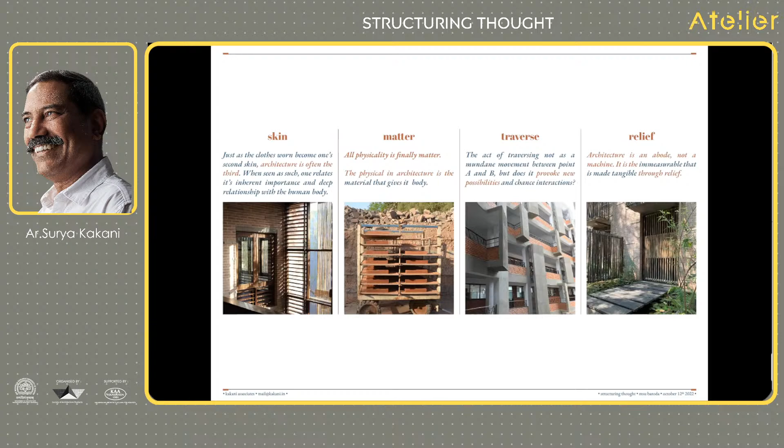Next. So if I was to explain skin to you here, this is a project, the corporate headquarters of a company that exports bed linen to Scandinavia. This is in Vatva, in the industrial estate. This is a blown up ISO. I'll just quickly read this: we had done a double wall kind of system where the idea was to reduce air conditioning loads. So the main building is clad within a singular extra wall on the outer facade.

The skin is that which mediates between the real outside and provides an immeasurable experience of the everyday. We are in it all the time. It is that space within which we are private and social simultaneously. It is thus required to address far more complex realities. It is also through the perception of that skin that the body is experienced. And when I say skin in this context, you understand what I'm saying—it's that skin there.

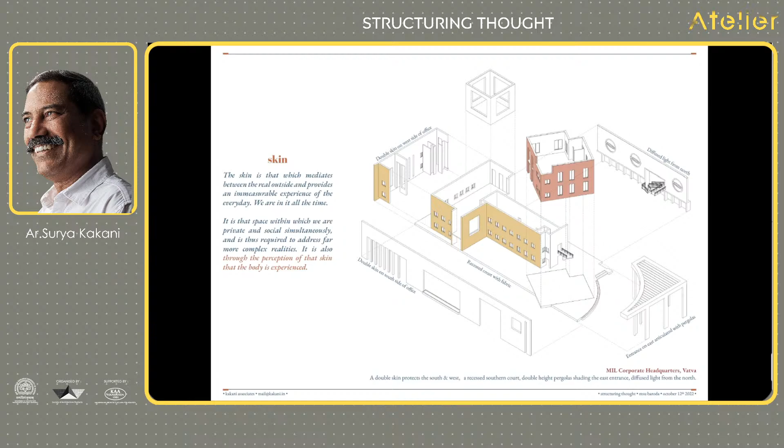Next. In our geographies, how we mold, create, invent the skin is dependent on or arises out of our concerns of resources, material realities, climate appropriateness, technology, energy consumption, aspirations. So do we see the skin as just an object that is just the cover? Or can it have all these things we just talked about?

This is a factory, the same corporate office that you saw. This is the factory behind, where you can see its deep-set windows. So the skin is made out of load-bearing walls with red and fly ash bricks interspersed. This is the corporate office, where the courtyard on the south side is covered by a fabric structure, which is what you call the green net—you get a gray net, it's actually that gray net. It shades the court and allows diffused light, and yet you get a court.

This is a campus of a kindergarten where the large louvers are two-floored louvers, which open and close depending on the condition outside. If it's pleasant outside, it's a large space on both sides, like this kind of space which has got louvers on both sides. So if the weather is beautiful, the skin opens up, and that's what that's about.

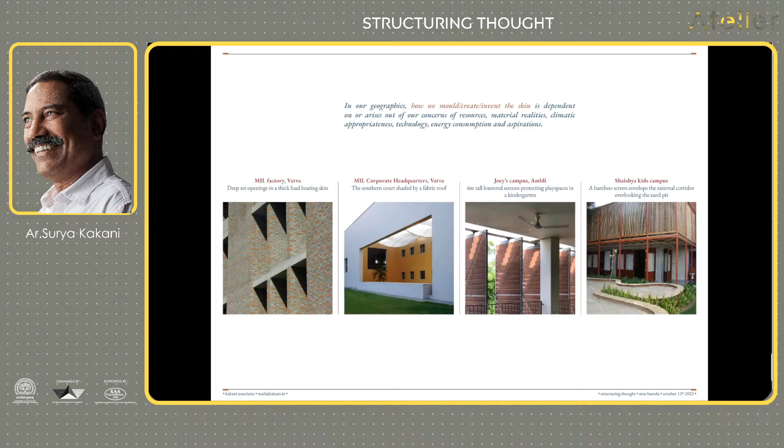The skin mediates between the inside and outside, and its resolution marks this relationship. The act of its being is realized in the way the skin modulates, addressing myriad realities that are expressed through the articulation of its apertures.

You understand what apertures are now? All our windows are apertures. The windows are the aperture of our walls, which is the skin. In this case...

This skin has been—this is the factory, where this is a double wall. The wall is load bearing, but it's been turned around in a way that it becomes a shaft. So the air moves in the shaft and is released at different levels and then exhausted out from the center. So the skin becomes a breathing skin, which actually gets fresh air from outside into the factory and deep inside.

This is a large span, about 50 meters by 70 meters, with load bearing outside. So the outside skin is thick, it is solid, you can't see out except through these deep windows, which you saw in the earlier shot. And the breeze is taken in through these shafts. So this is how the skin has been modulated.

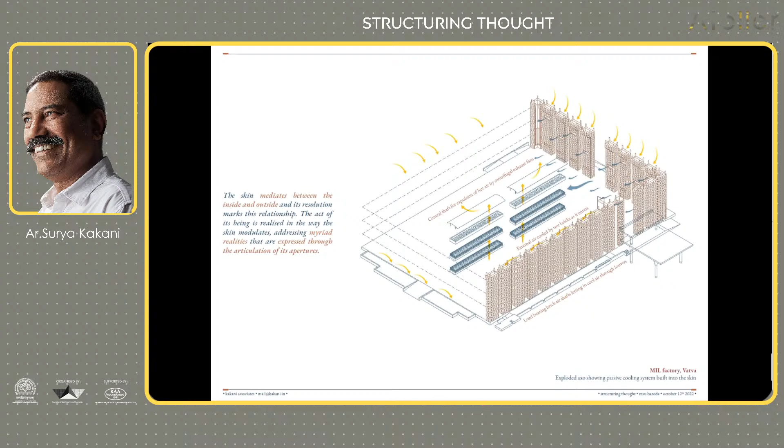That's a detail of that. It's better explained here. You can see the thick wall, the breeze comes in through here and moves into the space and moves out from the center. This is what you see on the outside.

The walls, and this is the basic structure. This is a three-floor load bearing structure.

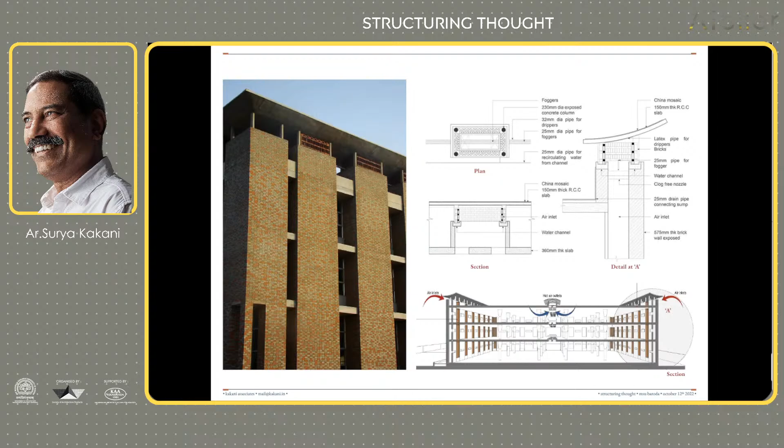These are just samples that we did. We wanted a passive cooling system that Dr. Chamanlal Gupta was helping us with. So these were various experiments. That's a close colleague, Raj, an engineer who we've been working with together for now 15 years plus. So basically we did various experiments about which is the best way to allow the breeze to pass through these kind of surfaces so it cools down and then goes into the surface.

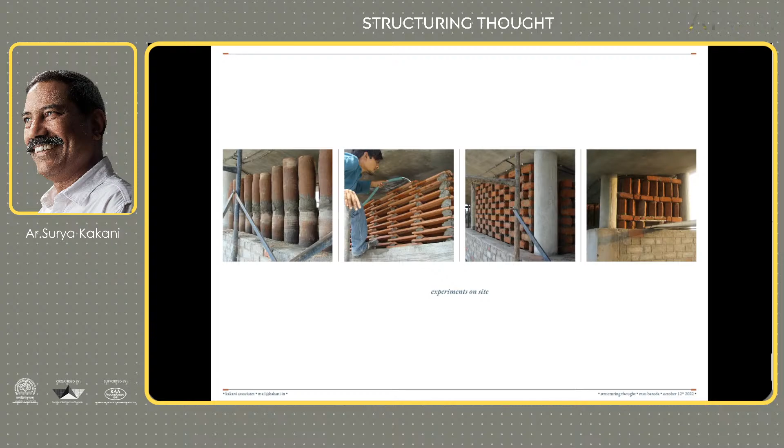So we did these cylinders of clay, like matka, but then we had problems of fungus on the outside. We realized maintaining would be a problem. We looked at Mangalore tiles, we looked at brick in different layouts. Finally, we went for brick in this pattern.

So that was about skin. Now matter. How does one design something conceived with a material consciousness that nurtures the building through its life and enriches the same? The practice has been dabbling with this through the lenses of embodied energy, social equity, resources, maintenance, and building life.

I don't know how many of you—by now I think this generation is supposed to understand embodied energy. You must check out what it means, because your next 40, 50 years is going to be all about these areas that you're going to have to work on. So embodied energy is an extremely important concept.

Keep that in mind. Social equity—social equity basically is how much money do you spread out. There is an X amount of money that you're spending on building a building. Out of that proportion, how much of the building amount goes to skilled labor, artisans, craftsmen, or even labor, or a major amount goes to an industrial system?

So if you use certain kinds of technologies, you'll probably be paying an industry, a corporate. But if you use certain skills that exist amongst us, load bearing, simple load bearing skills, which give you a lot of other advantages—I'm just using one example because that's the one we've taken, but there are so many other skills available in our system where you're able to create a huge amount of employment, and along with that create a certain quality of experience when you're actually working through the making of this building.

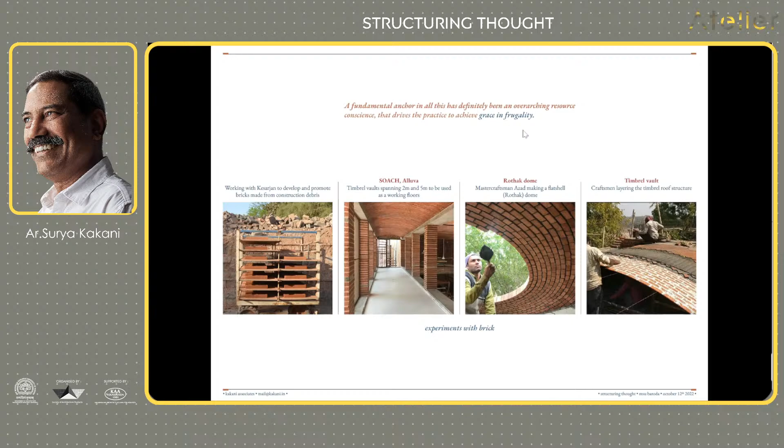Continuing with the idea of material, basically matter, collaboration with craftsmen, engineers, contractors, and other agencies have provided insights that allow us to refine the building product, and make this a joyous process. The interactions constantly push us to re-examine construction practices and available skills, allowing us to add value to an otherwise rote process. You know, you can simply draw a building and give it to an agency, and the agency will take it forward and build.

There's enough expertise now on ground. Everybody knows how to build walls, everybody knows how to put columns and beams and slabs, so your job can actually be finished in your little studio. But it's up to you to decide whether you want to let somebody else enjoy it, or you want to partake in the joy of the process coming up. So how do you investigate? How do you become part of that? And I think that's the other thing.

When you investigate and begin to think about these concerns, you will start thinking about various ways in which material can be harnessed to your advantage. So in this case, in the MIL factory, that large span factory I was talking about earlier, it's a large span, about 10 meter spans, columns. You can see in the last slide.

There was a lot of concrete that would have been used, and I don't know if some of you may have done your structural engineering class - most of us must have slept - but for those of you who may remember, you actually don't need concrete through and through. There are parts where concrete is not needed. It's in tension, you don't need it. So you can actually remove concrete in those spaces. That's what is technically called a filler slab. So check out filler slabs, where you can actually save on concrete quite a big time.

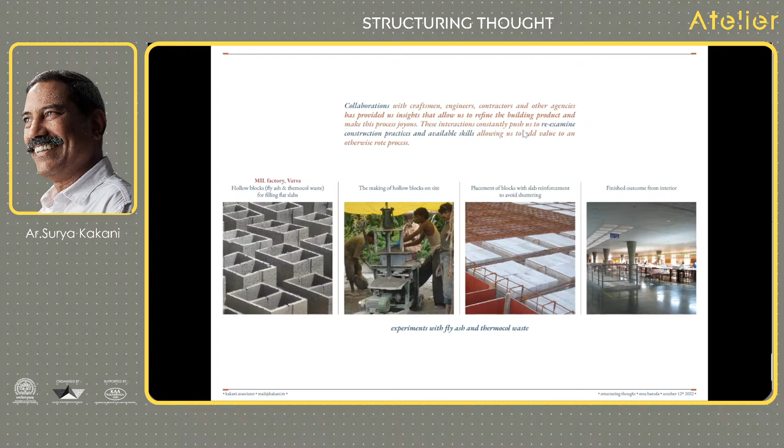So this is what you see, this is what you get as the final product, bottom of this slab. And so much concrete is saved. Next.

Again, understanding construction practices, production practices, and resource constraints pushes us to innovate and inform the making. So it's like this in our own studio, where we've actually used a lot of bamboo as jalis, as doors, as boundaries between spaces. Similarly, the same material we've used on top of the shuttering as a texture giver. So these carpenters are working for us here, and you can't see it very well in this slide, but when you remove the shuttering, you get a fine grain bamboo texture on

the roof. Similarly, the jali: when all the creepers are grown up on these jalis, it becomes a beautiful space from inside. You get the fragrance into the room. So it's the same material used in different ways. Just an example of that.

Next. So I'll explain these jack arches a little in detail, because one of the things I realized is that when we started to do a jack arch, this was one of the first times we'd done one. We'd done those other things five or six years before, but we've started really looking at alternatives in roofing only in the last seven or eight years, because for some reason information wasn't really available. Structural engineers are not really used to this now. B, it's not that somebody's done it before you here in these parts.

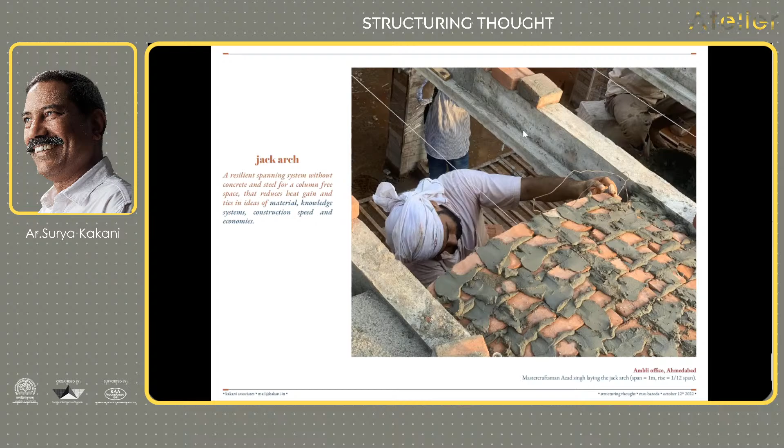So these are basically horizontal beams on which... I'll go next, please. I'll explain this as it goes. You can actually see this. This is the first layer. The first brick is put in like this. The arch is marked, and then the brick is put, and then the next bricks, and then the corners are filled in. So the first arch is stabilized, and then you continue building the arches.

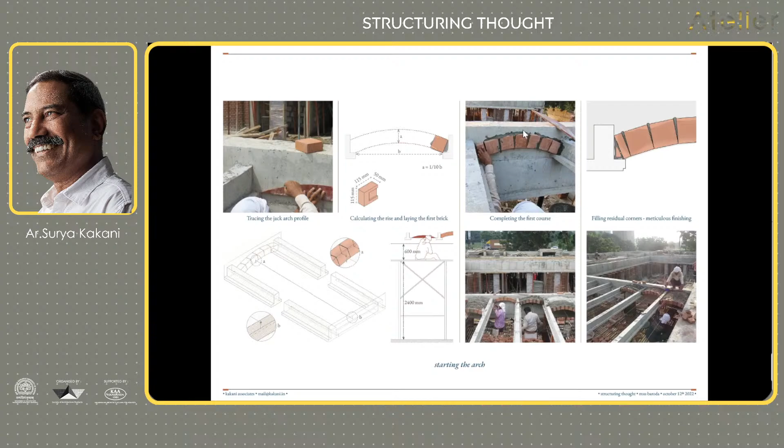So you can make that arch up to maybe a meter or so, and then the person goes to the next one, builds the next one, builds the next one. So a couple of masons are continuously busy. And in less time than it takes to build a normal slab, one can actually do this whole thing. But fundamentally, the largest advantage we've found is it gives you a thick slab.

By now, we all know that it's not the south or the west that's the real culprit. The real culprit is our roof, because the roof is sitting in direct radiation. It's like how your head gets heated up in the sun. It's the same thing with buildings. The roof is the biggest culprit through which induction of heat happens into your walls and buildings. So if you are able to save your roof from heating up, or at least reduce the thermal gain somehow, this would have a major impact.

And so systems like these, other than skill and obviously quality of space, are also helping you increase your thermal lag, reducing thermal gain. So these are just slides which are showing those spaces.

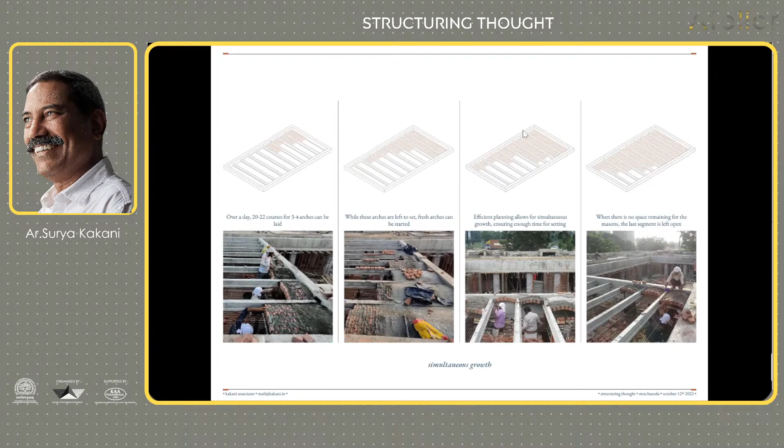I'll go on that side. Is it easier?

Yeah, much better. So what happens is, if you look, the fellow is actually here, but when he reaches towards the end, obviously he can't be sitting. So in the last one meter, we put up a small system like this, with pieces of shuttering in the form of an arch, and the last pieces are put up from the top like this. And so this whole thing is actually built on site, and this is the kind of space that you get. This is just a blow-up of a drawing.

So we do all these detailed drawings with the idea of how many bricks and what kind of courses, because this is what you're going to see exposed. Can you go to the next, please?

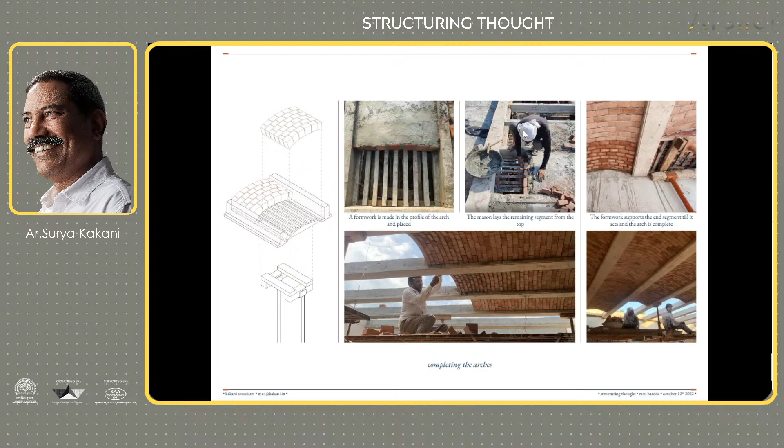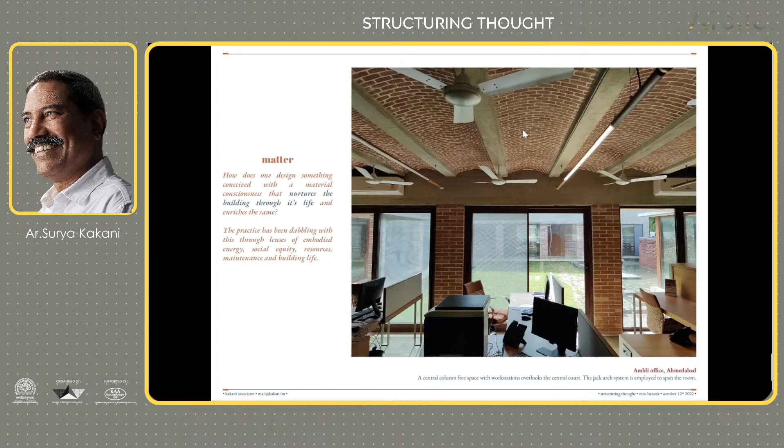Okay, maybe we'll get that slide somewhere else. Oh, the first slide of this, I don't know how many of you remember, was actually of this building when we started with material. Further, further. Yeah. So this is that space. Just to what you were seeing in construction, it was this space. Can you go now to? So the

Third, the last, is basically the third part, is about traverse. It's very simple. Architecture is static, but the user isn't. Right? One experiences architecture through traversing space. It is this traverse that creates joy, allows for the social, that connects the various experiences encapsulated in the building. So how you move through the building or to the building or around it is as important as the others that we've been talking about.

So this is a project we won in a competition about 12 years ago. HMR, Hyderabad Metro Rail, was passing through a very dense urban neighborhood, like the old city area, where you had a lot of vendors on the sides. And all those vendors and small shops had to be reorganized because they were refusing to move. And so they wanted to rehouse them, and they gave a site for a competition, and they said that we have to rehouse the space.

So what we did was, obviously, this is a street where, what are these vendors selling? They're selling things from 5 rupees to 50 rupees to 100 rupees, things like belts, kerchiefs, pins, all kinds of everyday things. Which means people are continuously moving through the bazaar, and on the spur of the moment you realize, oh, I need to buy some handkerchiefs, or you need a belt, or some pins. It's pedestrians walking through a bazaar, picking up things and then moving into their residential zones. Now that was very important to understand. It is not like your regular shopping.

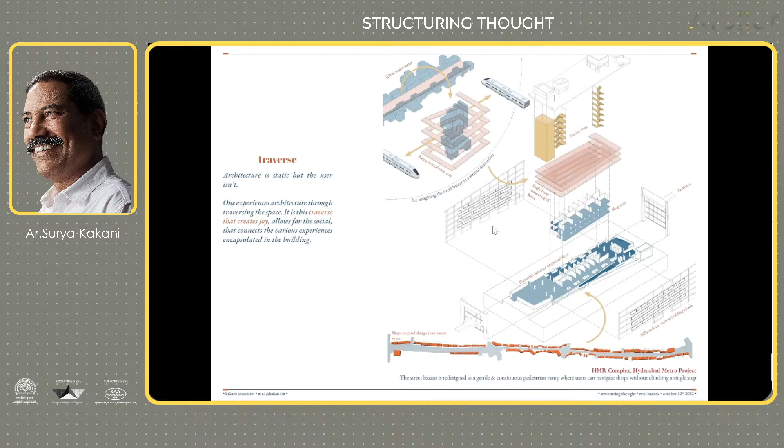So how does the act of movement allow one to connect, overlook, and hence activate? Can the corridor aspire to be more? I mean, most of us are used to corridors; they are our everyday thing. We're always walking in corridors. One of the problems with corridors is they tend to segregate spaces horizontally. If I'm on the corridor on the upper floor, the lower is something else. I don't know what's going on in the lower floor until I go to the lower floor. So they're basically segregated floors.

And other than the rooms, the corridors are really active spaces where people are meeting each other, going across spaces. In that space, can buildings begin to talk vertically? Simple thing, if you start thinking about it as an idea, then there are various ways one could. So we've tried our own ways, and there are, I'm sure, a zillion other ways once you start thinking.

So this is the HMR complex I was talking about earlier, where it's a part section where you keep going up these 2 floors parking, and you walk up like this. The final floor is an open food court and an amphitheater on top with a large TV screen for sports and other things, while there is a food court. So this is that kind of thing where the idea of movement becomes shopping and other things.

This is a school in Devisar, Kutch, post-earthquake. There was also this idea, post-earthquake, people were not very comfortable about upper floors. So what we did was we connected the upper floor and the lower floor with a ramp. And the upper floor is overlooking this. So the upper floor can anyway overlook the lower floor, and it's an easy walk down into this space. So that's how this particular area of this corridor was looked at, one corridor overlooking as well as actually moving up to the first floor.

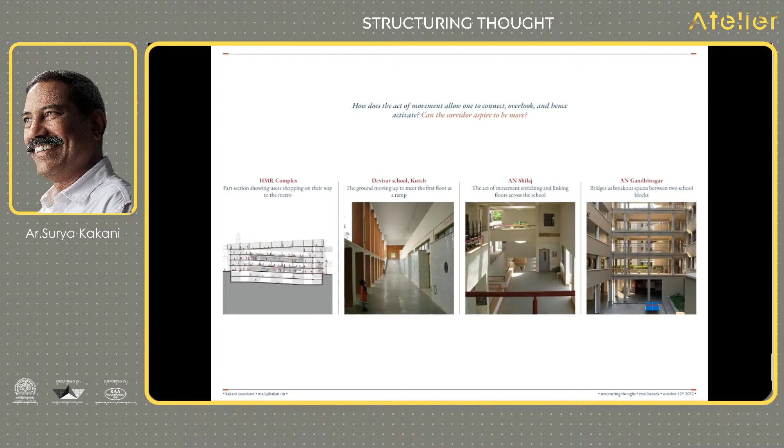Your client will tell you 5 things. An architect can make those 5 things 10 things. The client didn't tell you that I want a corridor that actually I can look over. The architect decides that. The client gives you a room for a certain purpose. The architect can say, hey, this is on the ground floor. I can actually open this and this